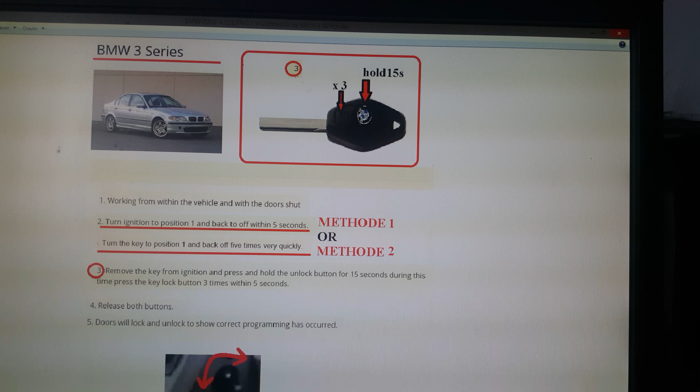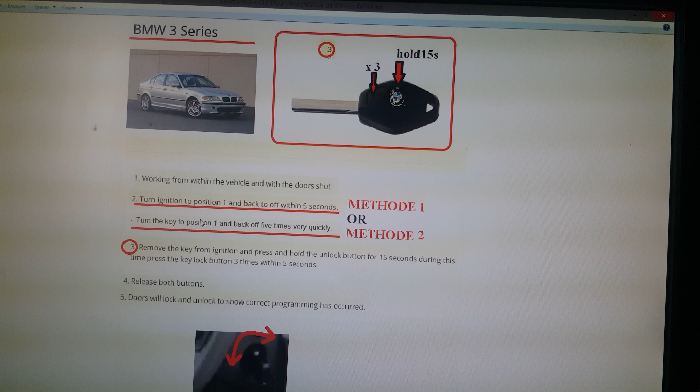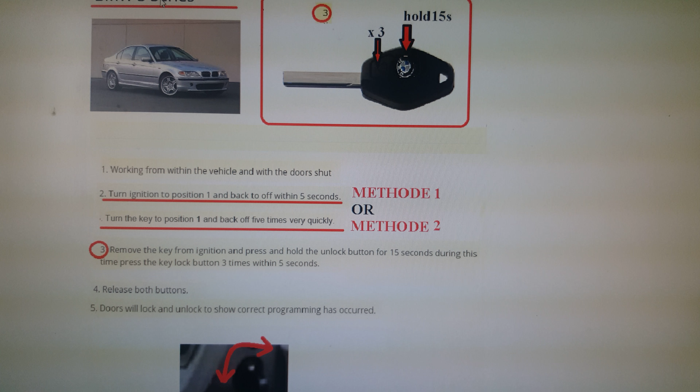Hello, I'm going to show you how to program a key for a BMW 3 Series. First, you have to be working from within the vehicle with the doors shut. You can try two methods. If method 1 doesn't work, you can try method 2.

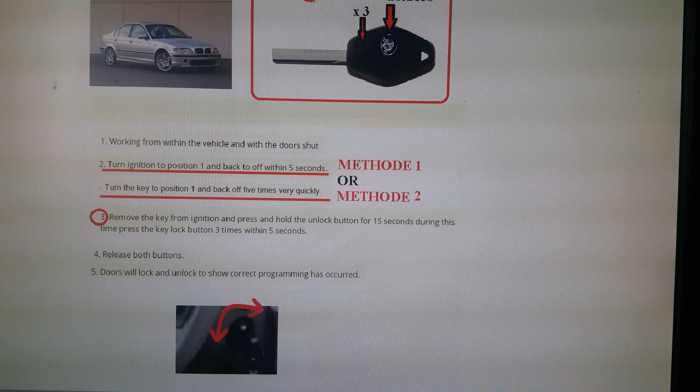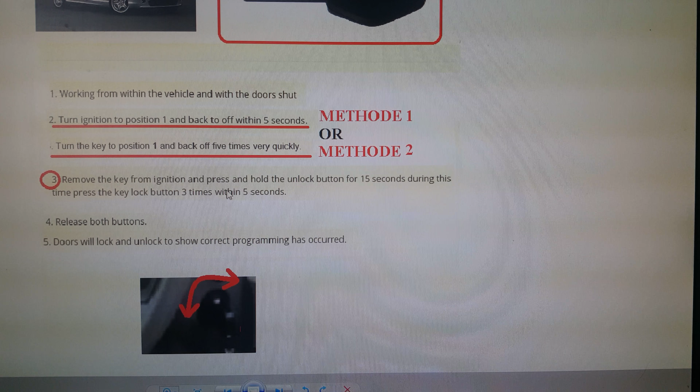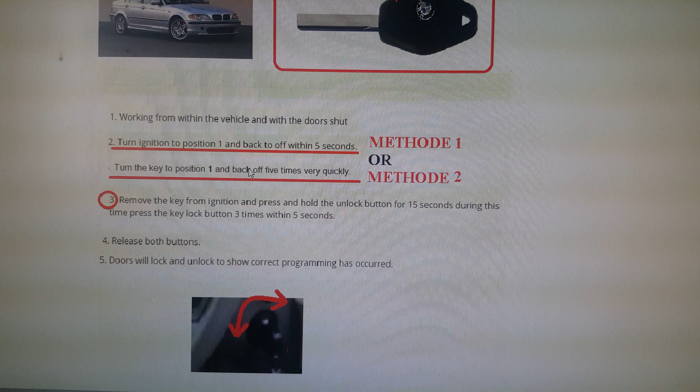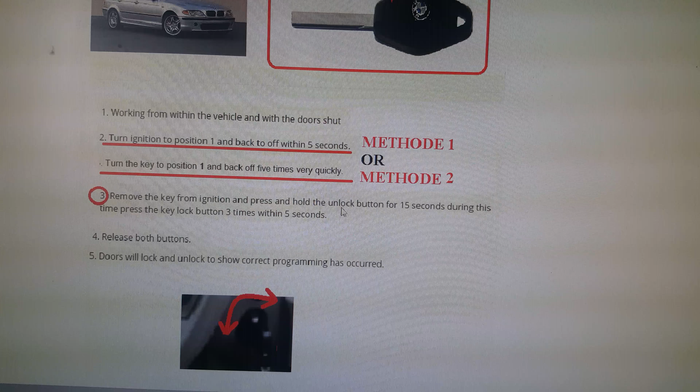So method 1: you turn the ignition to position 1 and back off within 5 seconds. So you put the key in the ignition and you turn back off within 5 seconds. Then you remove the key from the ignition and press and hold the unlock button for 15 seconds. During this time, press the lock button 3 times within 5 seconds.

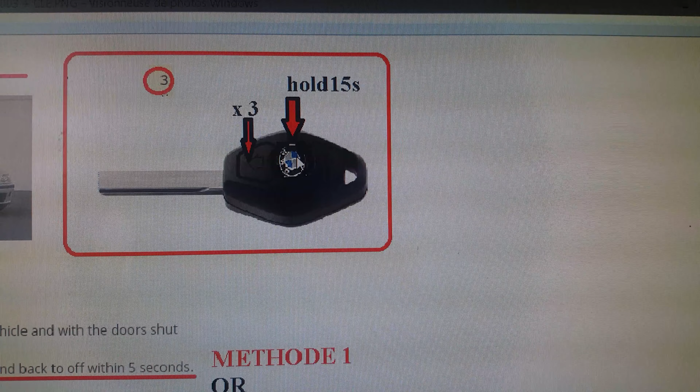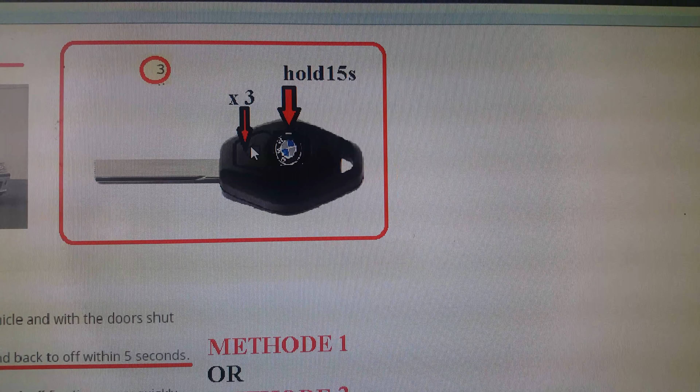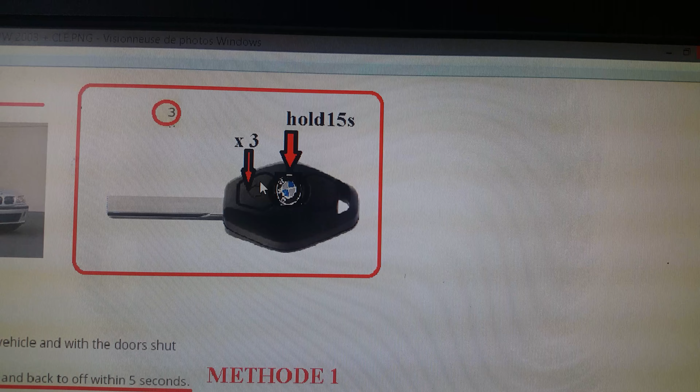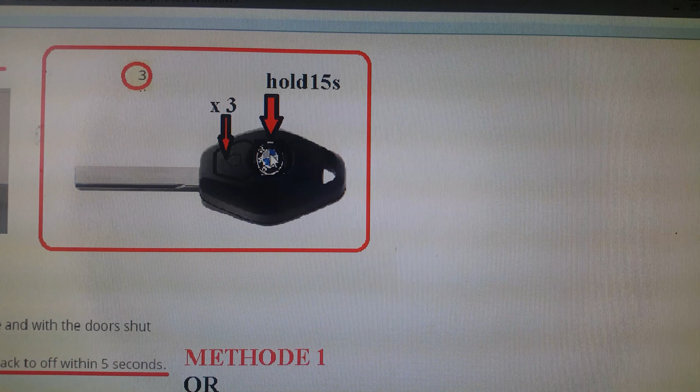So you have to press this button for 15 seconds, and at the same time you push this button 3 times, and on the third time you have to release the two buttons at the same time. Okay, so you push and hold this button, and then you push 1, 2, 3, and on 3 you release the two buttons at the same time.

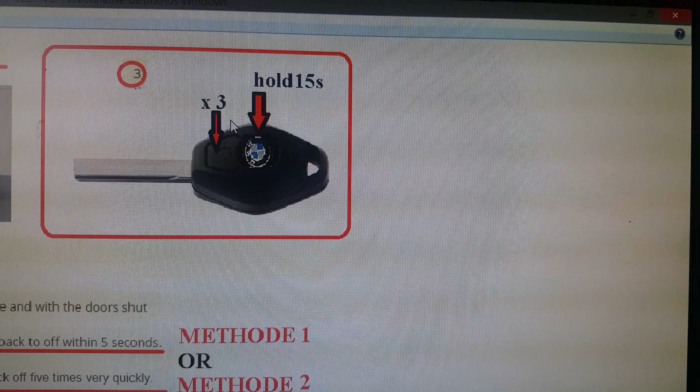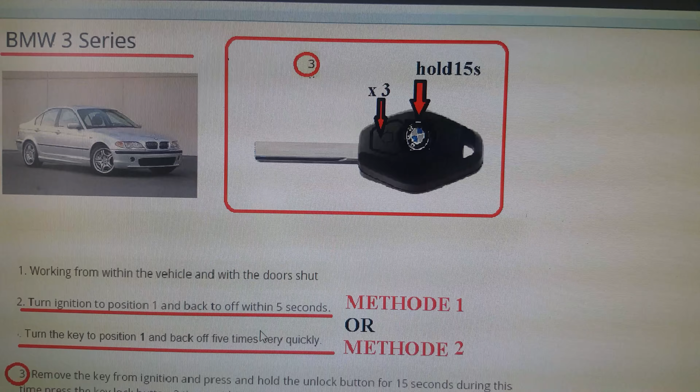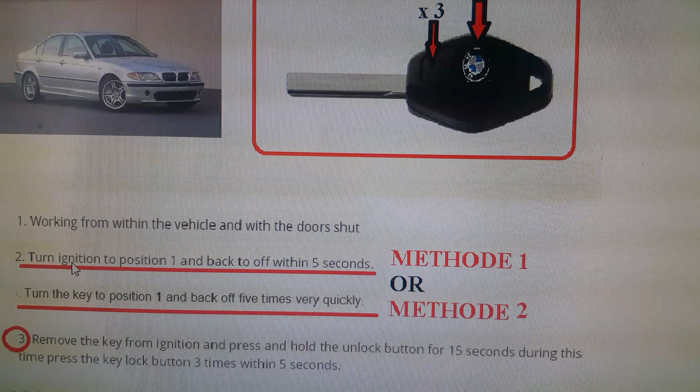Okay, and then the doors will lock and unlock to show correct programming has occurred. Okay, this is a method to show you how to program your key for a BMW 3 Series. I showed you method 1, but you can try method 2 if method 1 doesn't work.

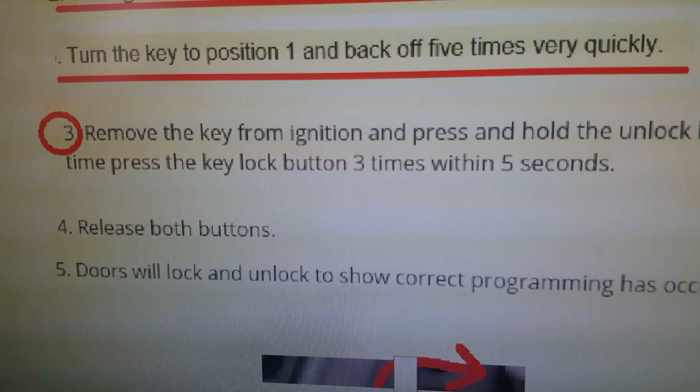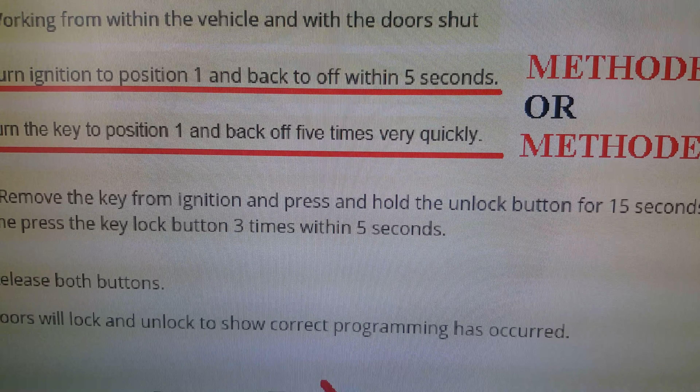In method 2, you have to turn the key to position 1 and back off 5 times very quickly. Okay, so it is here. You have the key in the ignition and you have to turn the key to position 1. It's the position before you start. You don't have to start.

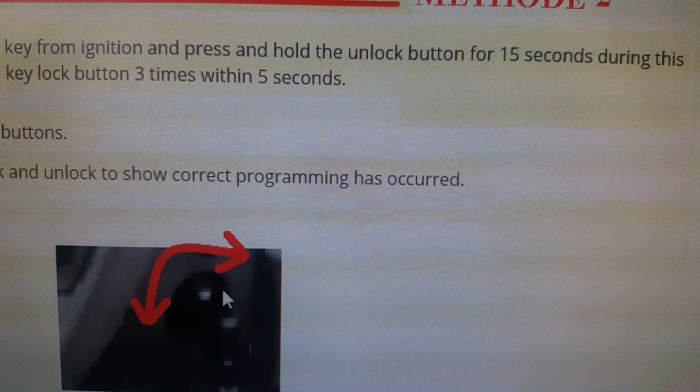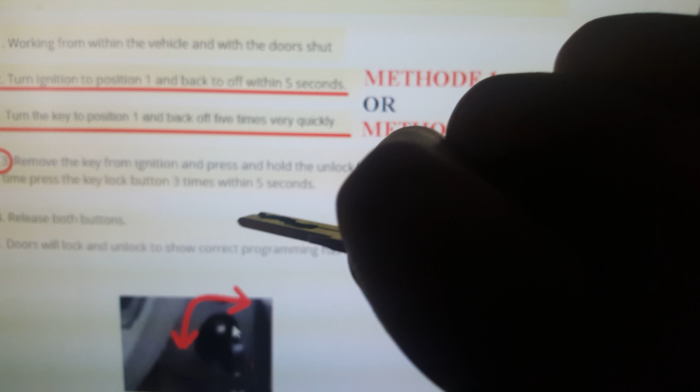And you back off. You put the key in the ignition, you turn it 1 time and you back off, and you do this 5 times very quickly. Okay, it is like that. You have your key, for example, this is your key, tack tack tack tack tack, 5 times, and on the fifth time you have it in off, and you can remove the key from the ignition.

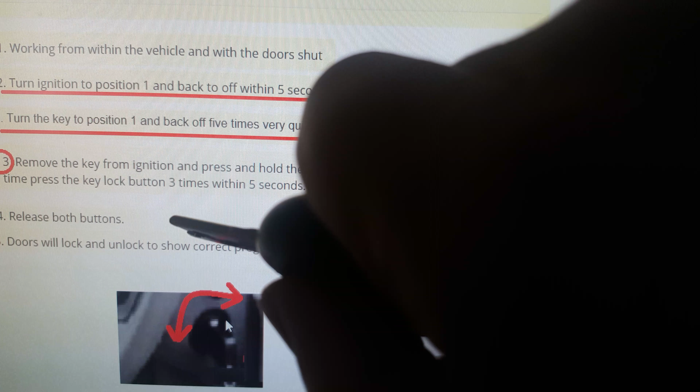So you put the key in, okay, 1, 2, 3, 4, 5. Okay.